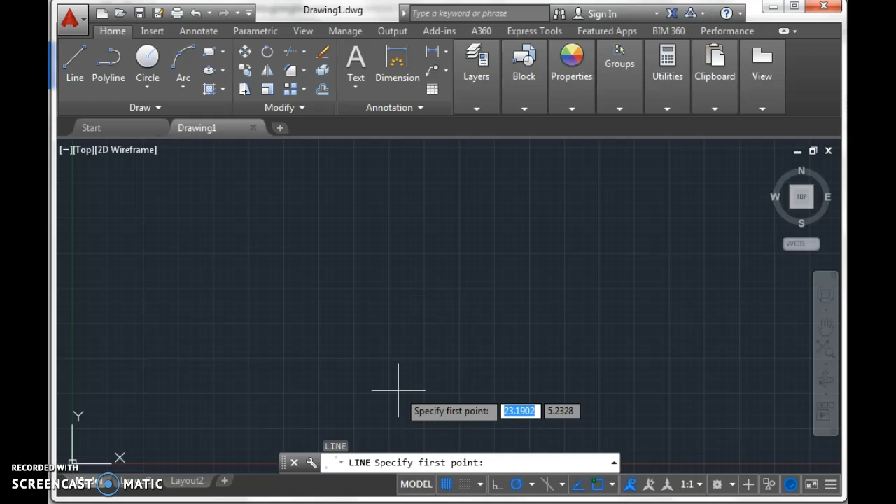So I'm going to begin by drawing a line. I type the letter L in, and all my L-labeled tools pop up. There's a bunch to pick from. I want to pick the one at the very top called Line. There it is. Click on it. If you read along my screen, it says Line, specify first point. I'm just going to begin somewhere over here. It doesn't matter where. So I'm going to click that point.

Now it says specify next point. I've got to travel exactly 12 inches across my screen along the x-axis. To do that, I use the keyboard command of that little @ symbol. Shift and the number 2 draws the @ symbol. There it is. I want to go at 12 inches, @12. And now I want to make sure I'm going exactly along the x-axis, or exactly east. So I can have the angle typed in of east.

East is 0 degrees. So the angle symbol is shift and the comma button, which gives you a small little less than symbol. And I want to go with 0 degrees. So my screen says next point @12. I type the angle 0. Hit the enter button. That draws that line 12 inches, exactly at the angle of 0.

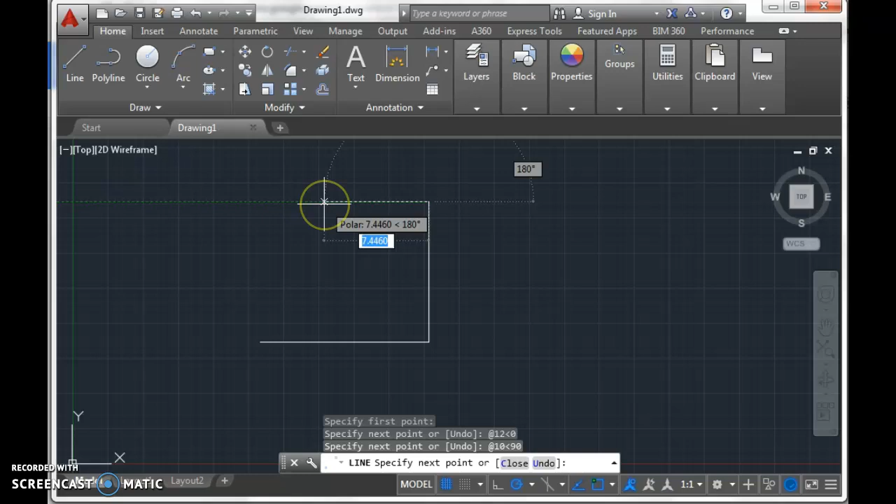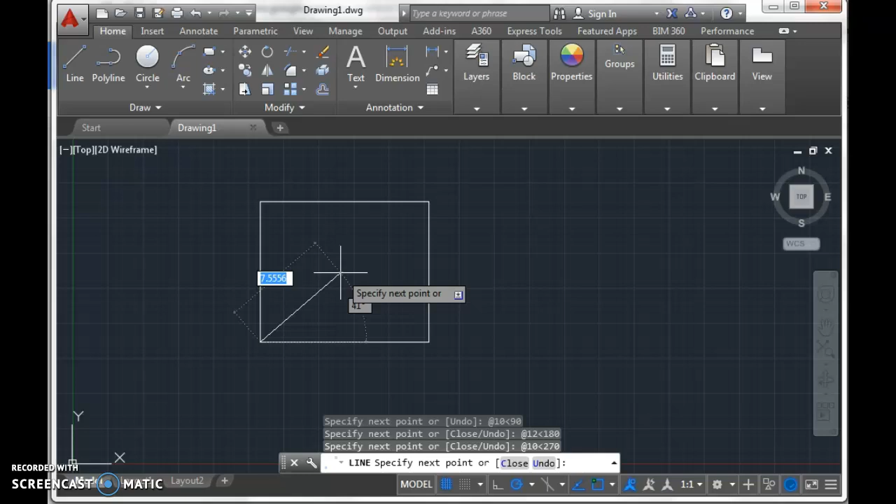And I need to go 10 inches straight north. So it's @10, the angle is going to be north, or 90. Now I'm going to go straight west. It's @12, angle is 180 degrees. And my last line is going to be @10, angle of 270 degrees. So my shape is pretty much done. It wants to keep drawing for me. I hit the enter button all by itself, that ends the command, and there's my shape.

I can scroll the mouse wheel upward to zoom in, and down to zoom out. If I want to move my drawing on my screen, it's a tool called Pan. P for pan. Hit enter. I can click and drag the mouse and move my shape where I want it to go. To end the pan tool, push the escape button. Escape exits that pan. Okay, what's next?

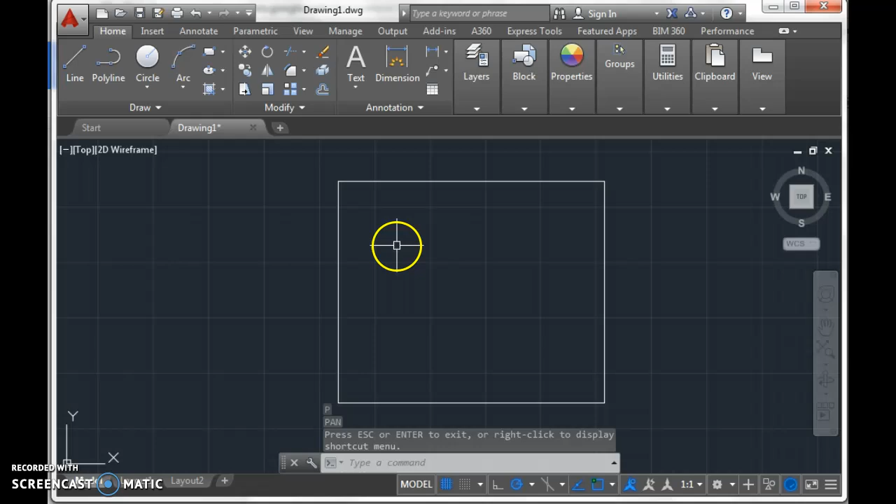I'm going to try building these little corner openings. I'm going to mark them all and probably build them at the same time. I'm going to build them as square-shaped openings and then round the corners later. So it says at least 1/2 inch in from all sides. There's a tool that'll help us draw some guidelines 1/2 inch in from all 4 edges. The tool is called Offset.

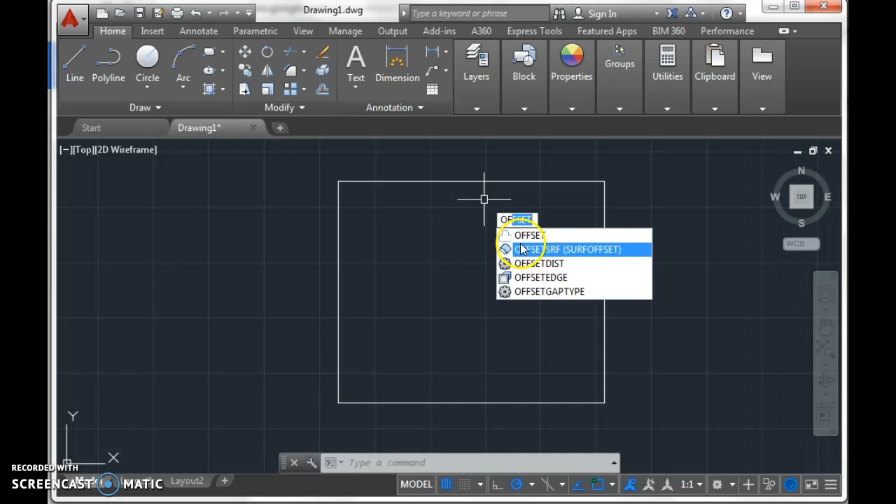OF for offset. Notice here's a picture of the offset tool. It's right here too. You can click on it or type it in. I'm typing it in, that's fine. It says specify offset distance. I want to go 1/2 inch. Hit enter. It says select object to offset.

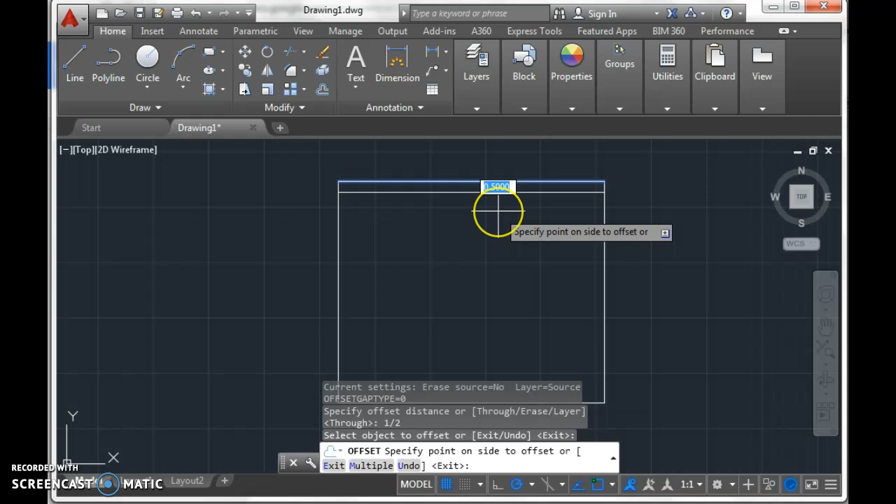I'm going to pick this top line, hovering over it so it turns highlighted. I click on it. I can move the mouse up or down. I haven't clicked yet. I'm going to go inside the shape and click to drop it. Picking this far left line, hovering, it turns highlighted, I click on it. Inside, drop it. This line here, inside, and the bottom one, upward.

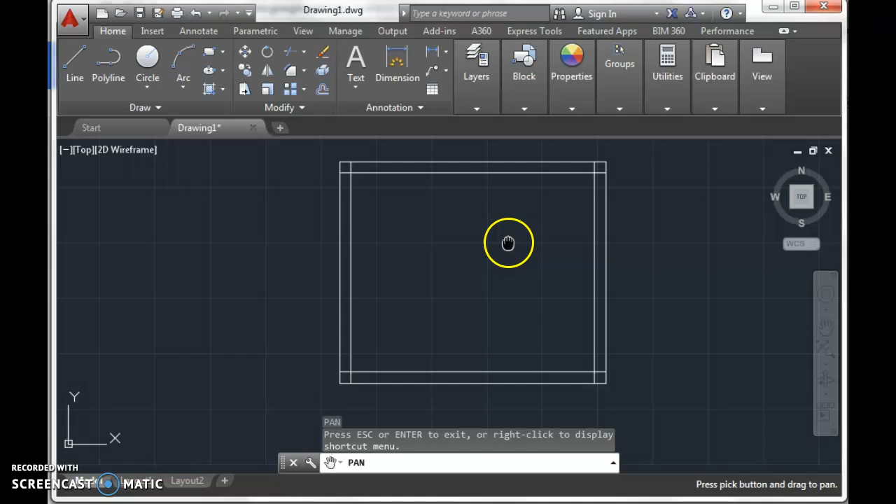Escape ends that command. I'm just going to pan a little bit and get close to the bottom of the screen. There we go. Escape. Here's the outer edge of all those little oval-shaped holes. I now need to have the inside openings. It looks like they're running parallel to the 12-inch line, so they're 1/2 inch across. So here's my 12-inch line at the bottom.

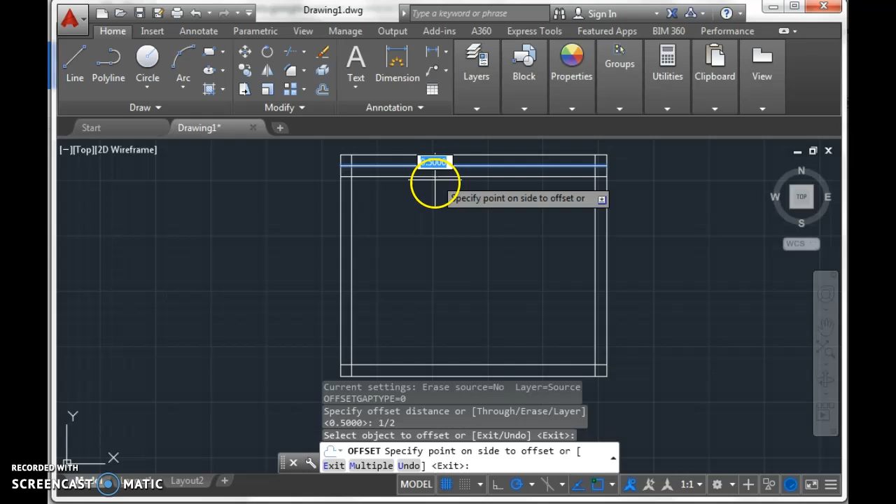So I'm going to offset another 1/2 inch. I'm going to pick this line I just made and draw it again. This line, and draw it again. Hit escape. Now I know somewhere in this little zone, this is the top edge of that little oval-shaped hole, and here's the bottom edge. Here's the top edge of the oval-shaped hole and the bottom edge.

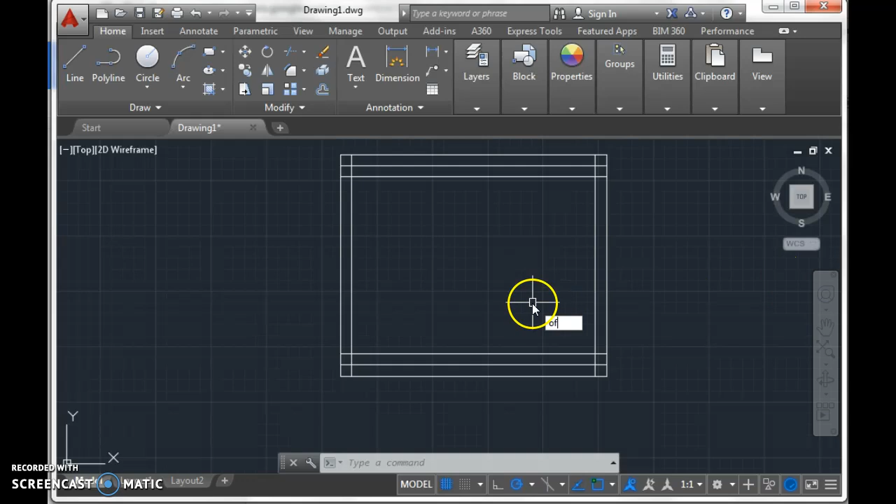The plans call for 1.5 inches long, so from this point to that point, 1.5 inches. If I offset again, 1.5 inches. I type in 1, with a little minus symbol.

1.5 inches - if I just typed 11/2, that's 11 halves. If I go 1 space 1/2, it gets mad and thinks the space bar is an input button, so it didn't like it. Escape. Offset, distance 1.5 inches. I'm going to pick the left edge of these holes and go to the right.

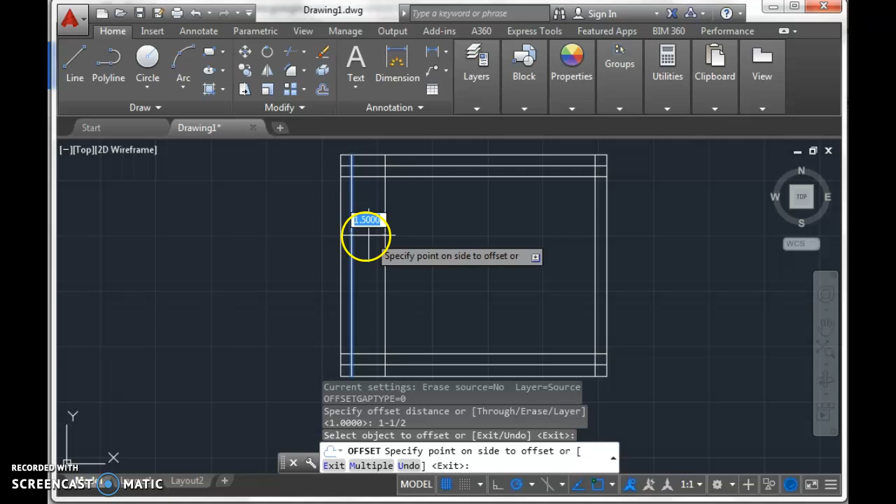So there's my little notch for these two holes, one there and one here. And I'm going to pick this line and go to the left. So here's my zone - right there's one of the holes, here's the other hole. Okay, there they are.

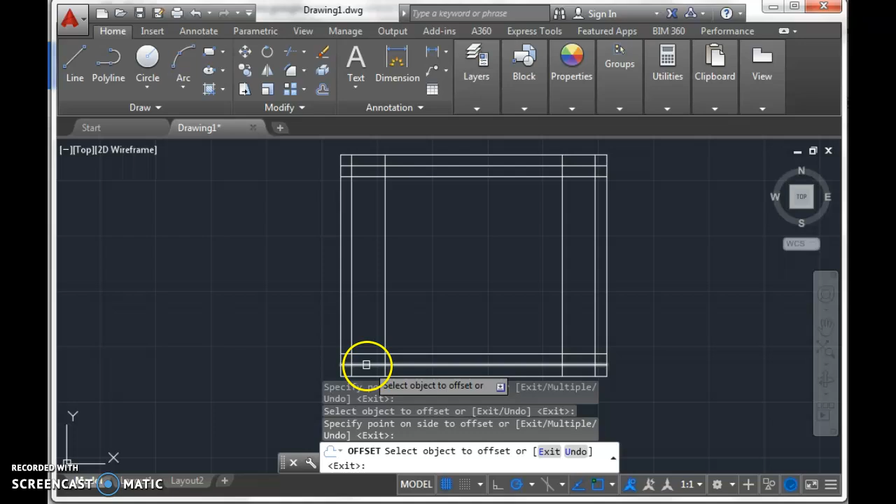To round these over, I've got to cut these lines to round them. If I do that, I'm going to cut off this long chunk of the line, which I need up here for that guy. So a few more steps here.

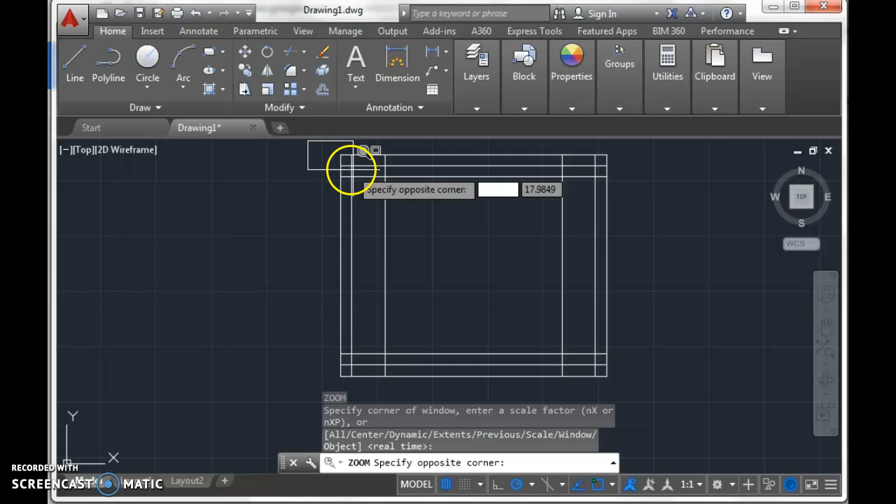I'm just going to zoom in, escape to end that offset tool. Zoom is Z, hit enter. It says specify corner of window, so I'm just going to click the mouse and drag that whole shape. Zoom in a little closer. Okay, maybe a little bit too far, but that's okay.

I'm going to pan it up a little bit. Got it. So I want to keep this chunk, but lose this big middle zone, and keep this chunk. I'm going to keep this small portion, but lose that, and keep that. So I have to do a lot of keeping and a lot of cutting - kind of watch carefully here.

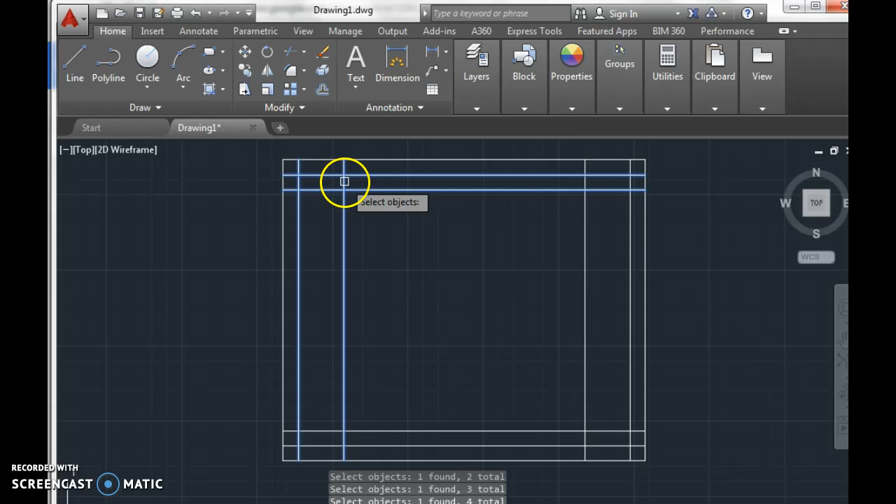I'm going to use a scissor tool, it's called trim. I'm going to trim away parts of my line. It says select objects - well, I want to keep that chunk, and that chunk, and that chunk, and that one. Those are picked. I'm going to keep that one and that one.

I'm going to keep that one and that one, and those are already all picked. So all the ones I want to keep are picked. I hit enter to input those lines. Now it says select objects to trim.

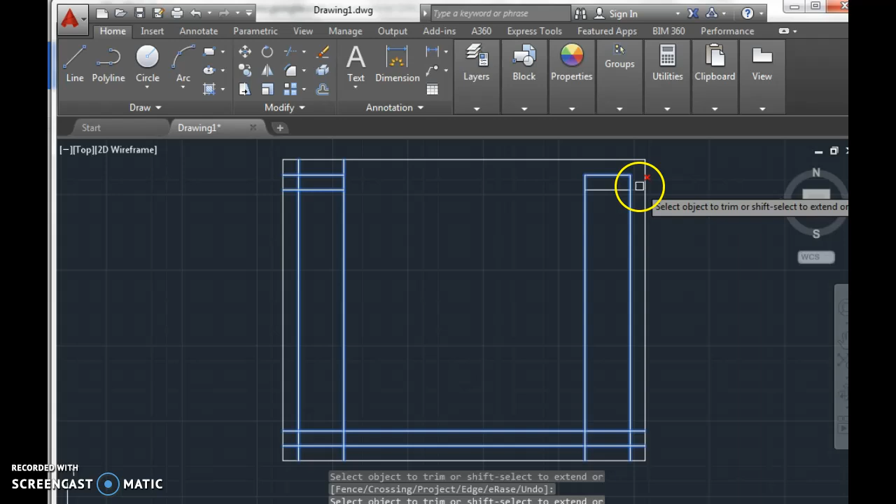I'm going to cut that zone away, that one away - so I'm cutting the parts I don't want. I pick the parts I want to keep, then cut what I don't want. So I'm left with those 4 rectangle shape openings that I'm going to turn into oval shape openings in a minute. Finish cutting all these away, clicking all those, chop those guys away.

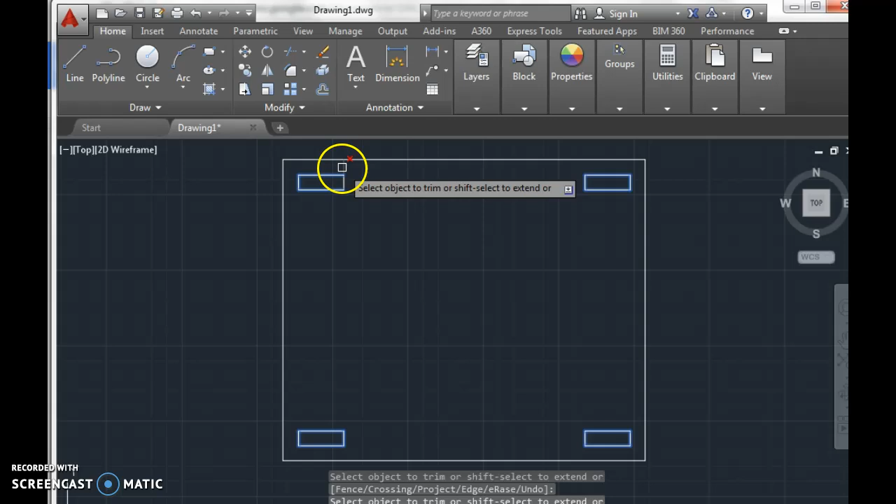There they are. So I'm just going to do one, just for the sake of time of the video. Z for zoom, zoom in on this small chunk. Okay, I've got to curve this corner and curve that corner. Well, it's a 1/2 inch diameter, which gives me a 1/4 inch radius.

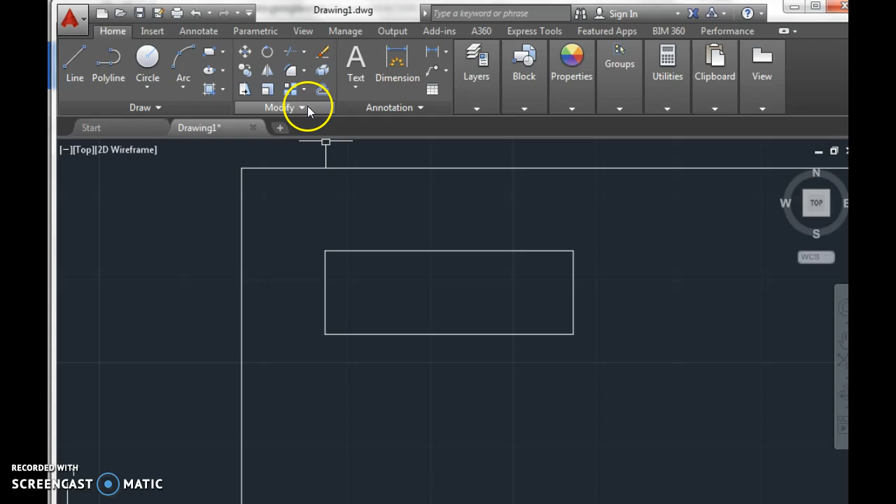This little tool is a rounding tool called a fillet tool, so I'm going to go F for fillet. First, it's off the screen here - hold on, let me zoom up. There it is. Do that again, escape. F for fillet, all right.

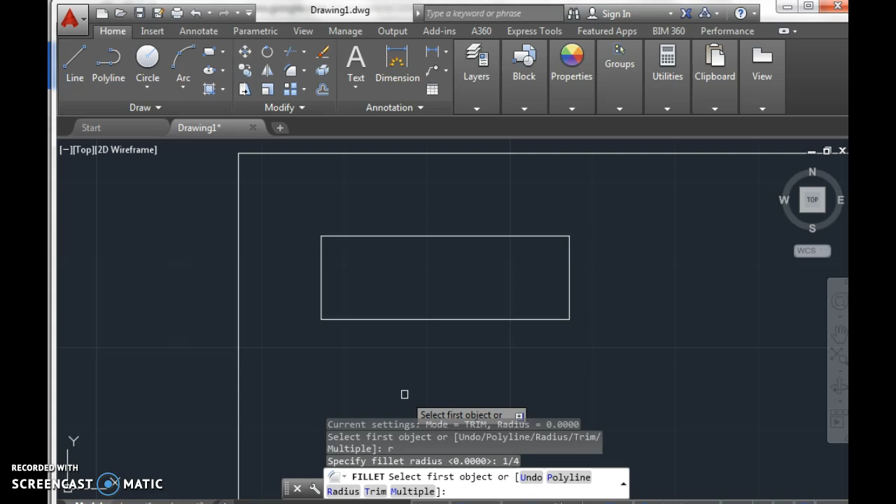I want to first give the object a radius, so I'm going to go R for radius. And I want a 1/2 inch diameter, a 1/4 inch radius. It says select first object. I'm going to pick a spot in this line near the corner - not the corner, not in the middle, but near the corner.

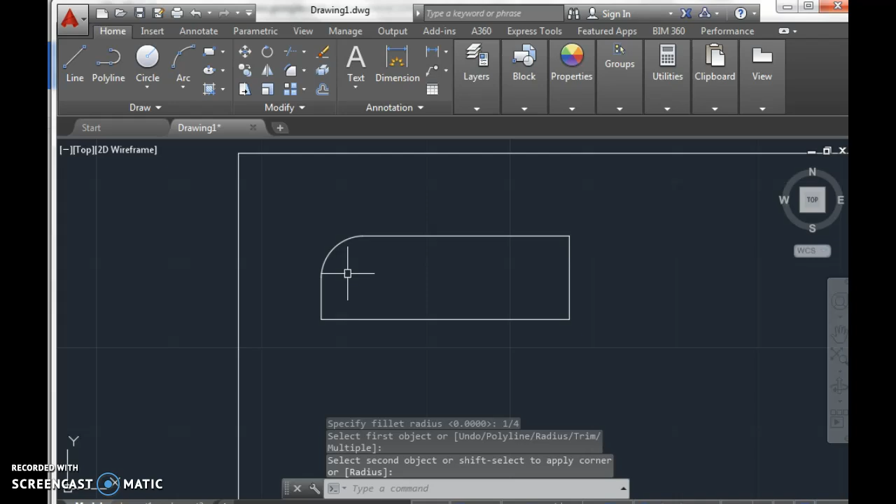And click. I'm going to hover over here and see if it kind of picks it for me. If I go too low, it won't pick it - maybe it will. Pick that corner, that corner, one done. I'm going to put a space bar, jump back into it again, pick this side and that side. Space bar, jump back in, pick it, space bar, click, click.

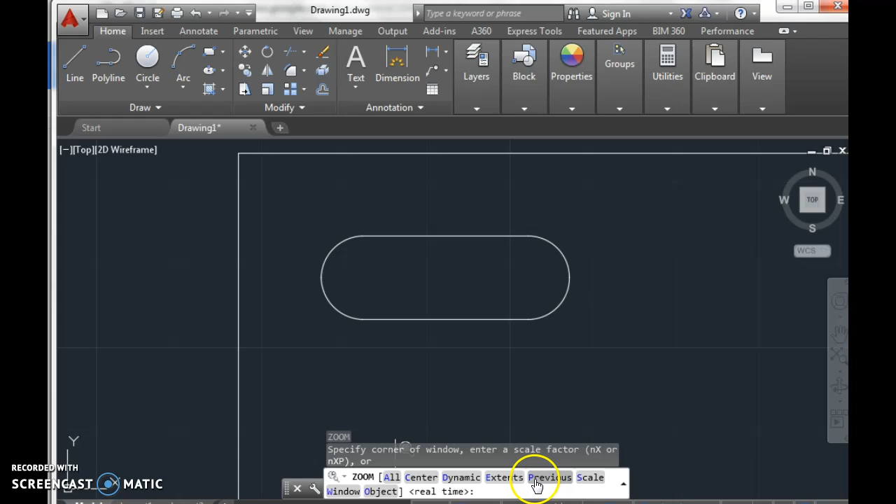Okay, I'm going to go Z for zoom, and do zoom to the previous screen. P for previous. Same thing here, same thing - zoom in, fillet, all 4 corners, all 4, all 4.

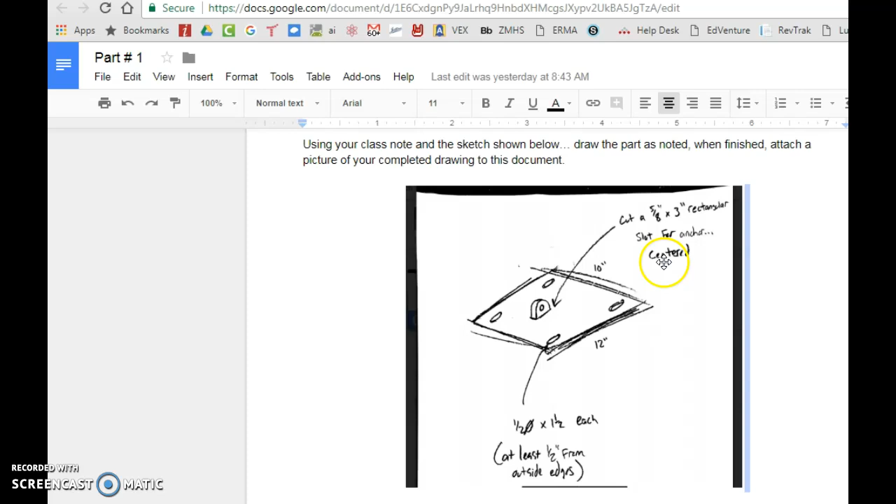Last step is to get the middle channel. It's a 5/8 by 3 rectangular slot, centered. 5/8 by 3. Okay, I'm going to offset again the distances. Well, this is a 12-inch plate - oops, 12-inch plate, and I have a 3-inch opening.

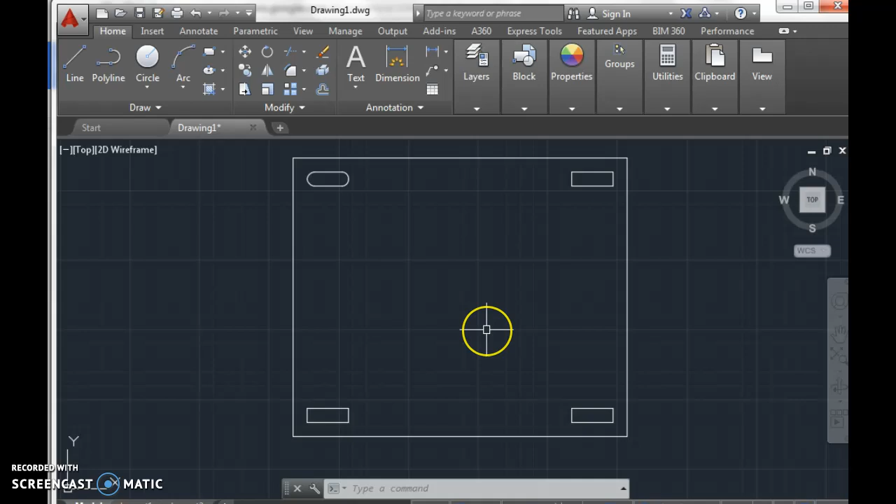So 12 minus 3 is what, 9? Right? So if I go in half of 9, half of 9, I'll have my left and right edge of that little 3-inch opening. So I'm going to offset, in this case, 4.5 inches. I'm going to pick this side to the left, this to the right.

This is a 3-inch wide opening, it's 5/8 tall. Well, it's a 10-inch plate. 10 inches minus 5/8 is, right, 9 and 3/8. So 9 and 3/8 divided by 2 is what?

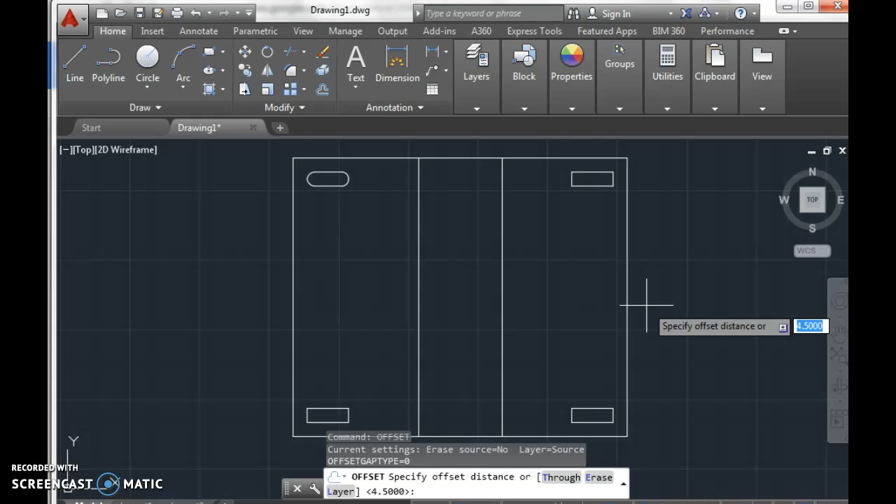Uh-oh, do you know? Well, 9 3/8 - what's half of 9? 4.5, right? So 4.5. It's half of 3/8, which is 3/16. So 4.5 plus 3/16 is my offset distance. So I'm going to go offset - 1/2, which is 8/16, plus 3/16 is 11/16. 4 and 11/16. I'm going to bring this side down, and this side up.

There's my little opening. I could either trim them away or fillet them with a 0 radius. I'm going to escape to end that command, then trim. I'm going to pick these 4 zones, enter to input that, and then cut these 4 away.

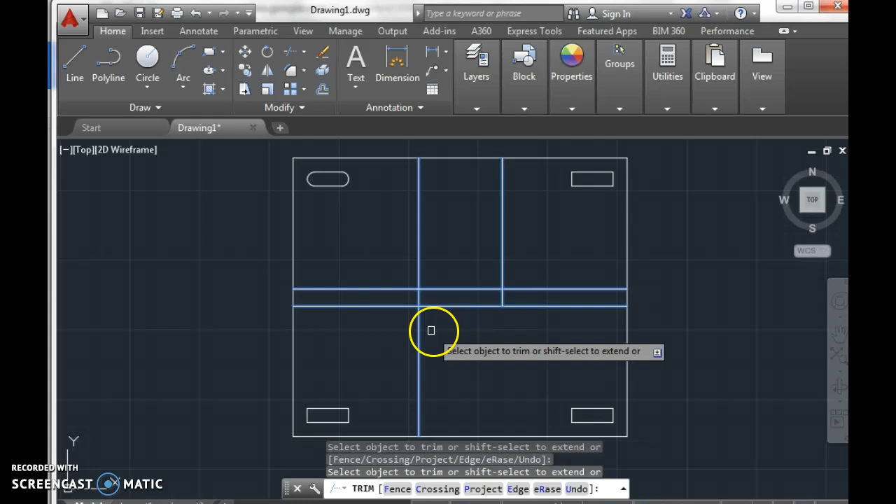And now I have my shape almost done. There it is. Okay, I'll finish these corners - shape is complete.